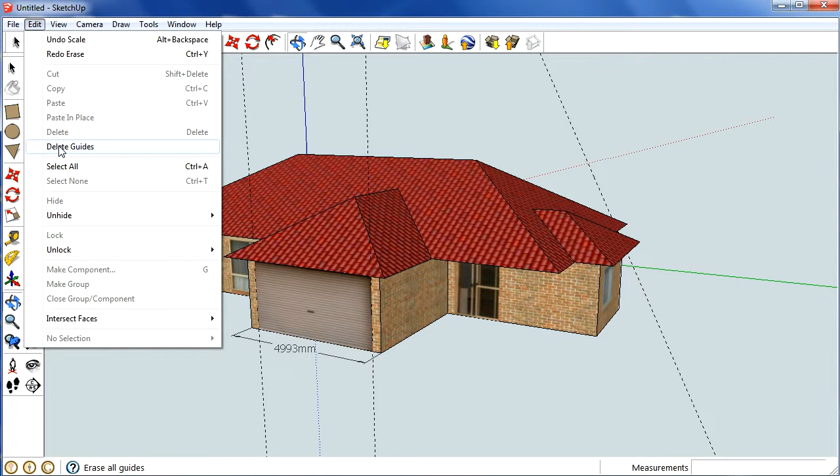Alright, the next step in this house project is to clean up a bit of the rubbish, by deleting guides and adding a few little extras just to finish it off before we go on to the next stage of flattening the parts so we can make a model.

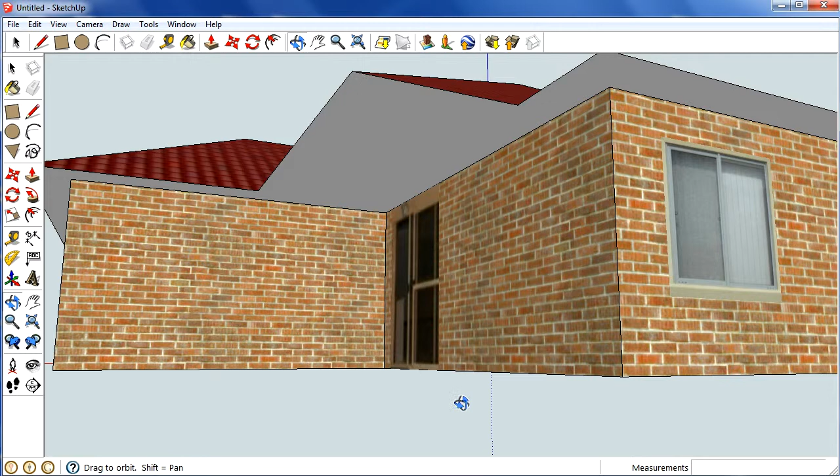What I'm going to do is draw something in as a support for this porch area, but before that I want to make sure all of these parts here are grouped up as one piece, so the parts I draw aren't going to stick to it. I'm going to use the move tool, move it upwards, and type in

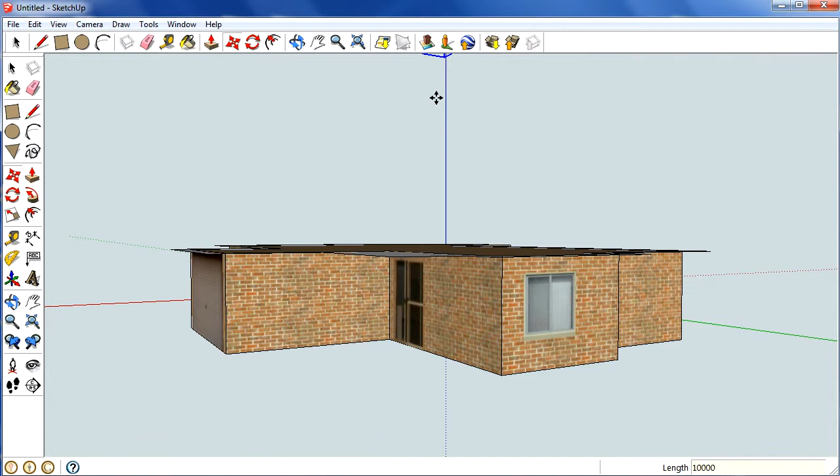10,000. I'm going to grab this top here, shift and click, so we've got both of them, make that into a group, and I'm going to select all of that, hold down shift, unselect the top, and make the bottom of the house a group.

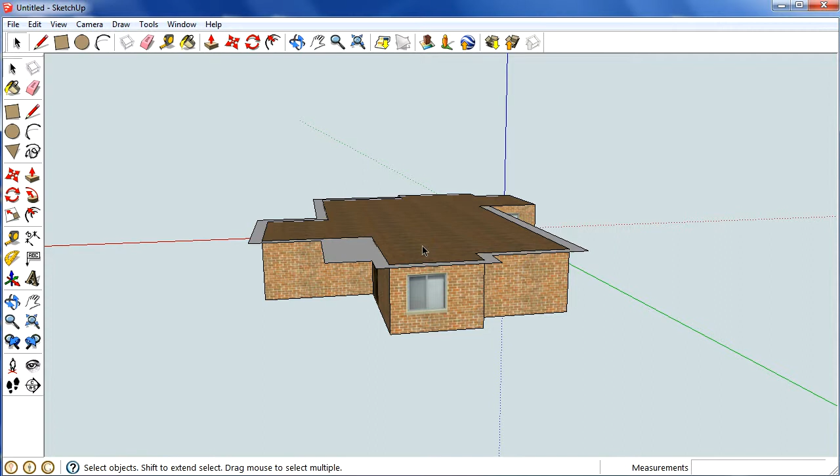So we should be able to separate those two, and that should all be done. I'm going to grab that, move it back down 10,000, and it's all together and cleaned up.

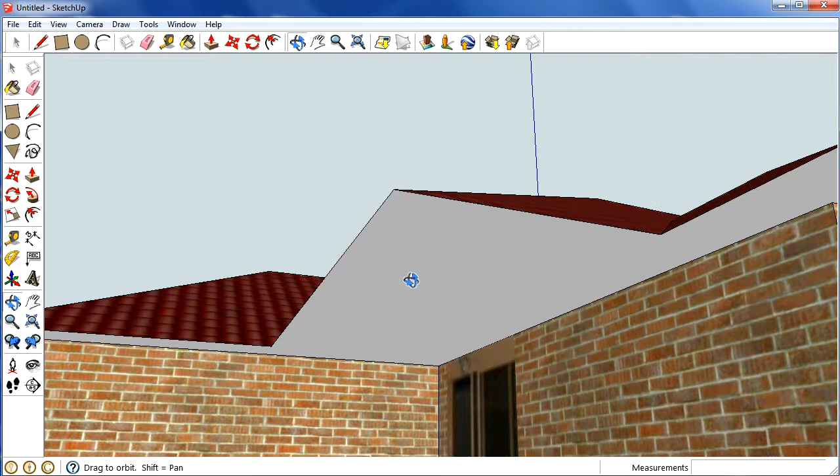We're just going to have to add this. Now the eaves on this house are roughly 450, so I'm going to draw in where the support would start. T for tape measure, and type the number in, hit enter.

That will give you the correct amount. Now when you draw rectangles and you want to size them up, what you want to do is drag them out and push them in larger than you would normally want. That way I can tell that the width of this rectangle is 169 and the depth is 814.

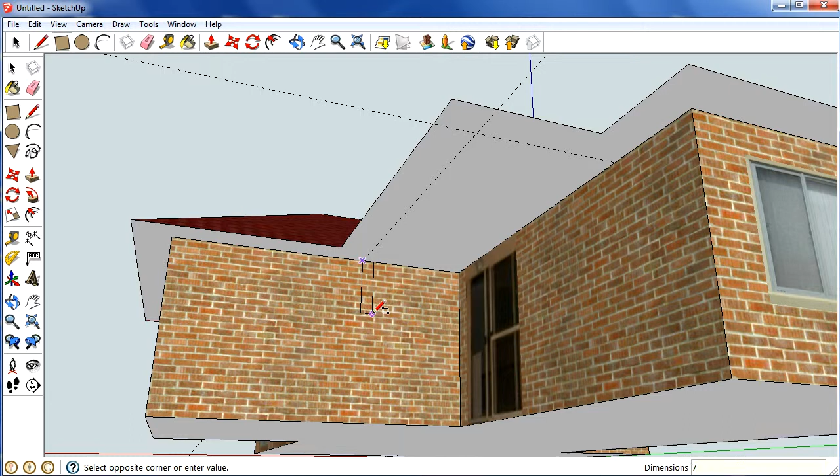and I'm going to push pull that out to the front. Triple click on the object, that will select it because everything else that's touching it is actually grouped up. So I'll make that into a group.

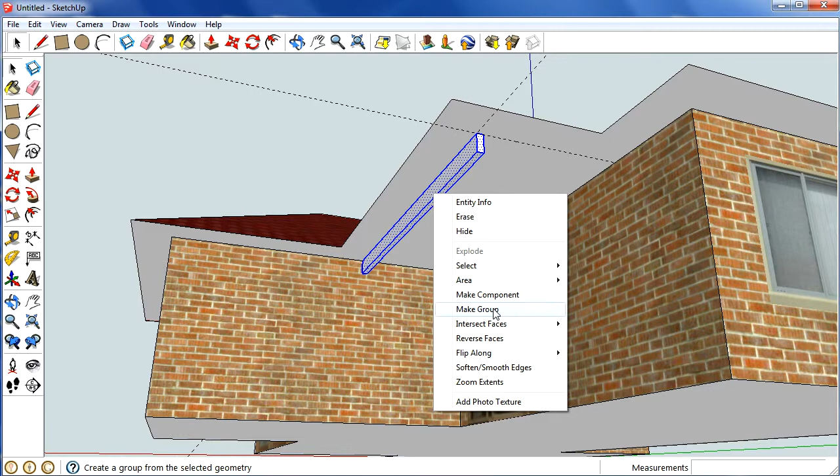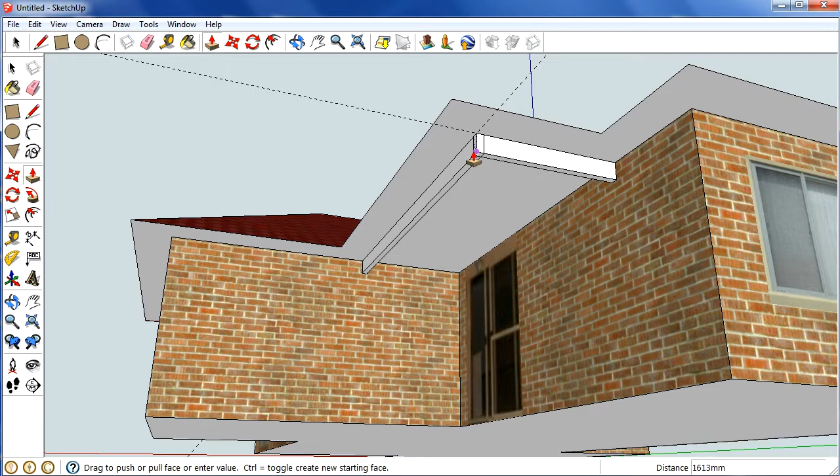Now grab the rectangle tool again, half a rectangle, drag it down this way. This time it's telling me the depth comes first, so I've got 200, 75, and I'm going to push pull that up to the front here, triple click and group that one up too,

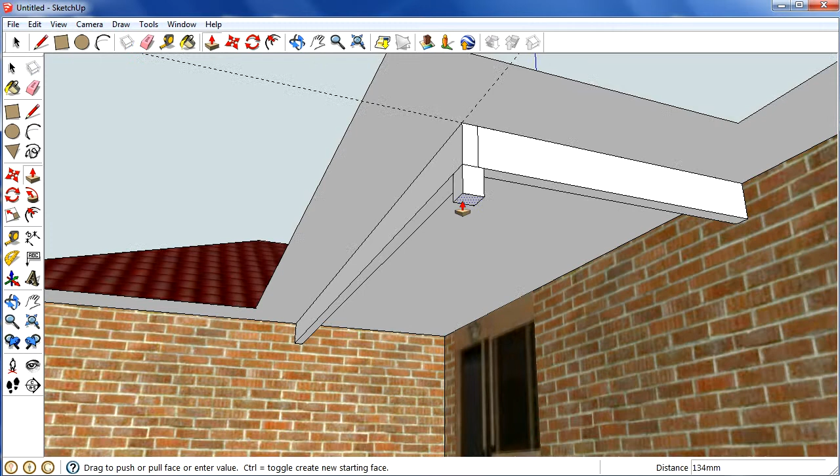and I'm going to put a post in here, 100 by 100, and if you zoom back a little bit and push it to the bottom of the house, that will line it up for you.

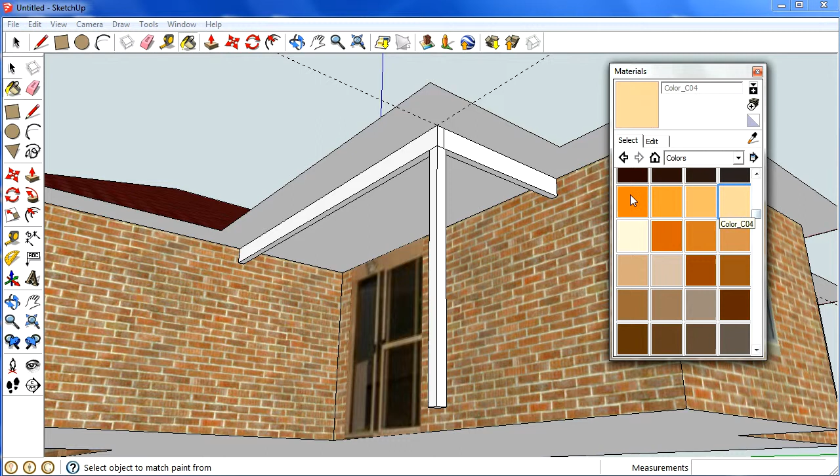Lastly, I'll make that into a group as well and start painting some of this stuff. So just find a colour that's sort of close to something like that to do.